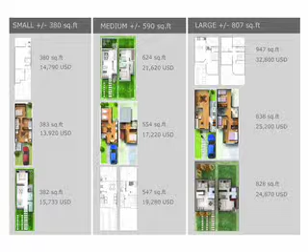They are done with this idea that the car is central in terms of standard or cultural standards. So the lots are very, very small, but they still always insist on having the car inside the lot and having the car in front of the house. So this is a disaster, because what could be free space, what could be the space for you to look out and enjoy a free area or ground level area, is always taken by the car. Other than that, the floor plans are a disaster because they're designed by engineers or by people who are just money driven.

This is what social housing looks like in Mexico. What's interesting is that, for example, these 3 houses right here, these 3 projects, are done in states that have extremely different climate conditions, and still they're the same. The other thing is it's just pretty much makeup, what they do.

Another interesting thing is that it's very aspirational, and the model taken for this aspiration is the American suburb. So I think that's a funny fact. And it's a fact that nobody's really questioning, so that makes it very tough.

So it's pretty much a dead end, and architects don't get an opportunity for this kind of architecture because it's stuck with the system. So the first thing you need is a good client, and we were fortunate enough to find this family. It's a business family, and in the first meeting they told us they were willing to do progressive social housing. Progressive is a word that is usually never linked to this kind of work.

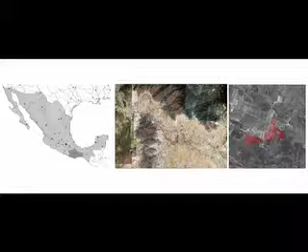It's almost like, in a way, complexity and contradiction, because any color is possible. They mix all kinds of color and then it becomes like a really tolerant system, where when you have so many colors, they just start to blend in a really good way.

The project has the difficulty, or the problem, that other projects like this have, and that is that the land inside the cities is too expensive for this kind of development. So these developments always end up being maybe 25, 30, 40, 50 kilometers away from the main city. So this is a problem, and it's not ideal, but you still have to work within these conditions.

So for these people to go from Oaxaca City, where for sure they will work, to this lot, they have to take public transport because most of them don't have cars, which is an irony because, like I explained before, usually their houses are designed for the car to be like the protagonist. So they usually use this kind of transportation to go, and then once they're in there, to go shorter distances they use these motorbikes.

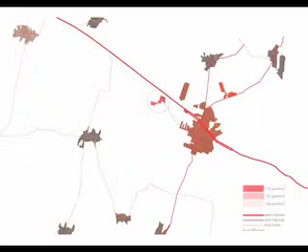If you look at it from an urbanization point of view, this is our site, but these are like urban spots, and they're totally unarticulated and disorganized. There's really no planning for this. This is the 2,000 houses that are the competition, or our neighbor, building right now. And these are our 3 lots.

So the first part of the project was this. It's one hectare, where we're developing only 100 houses because the urbanization was already done and there was nothing we could do about it. They asked us to keep it, and that we would have the opportunity to do the development of urbanization on the other 2 lots. So for this lot, we only designed the model of a house, which I'm going to show shortly.

Making a diagnosis of the place was one of the first things we came up with. This is the system of roads, and it's almost hilarious because it's like designing in the Wild West. When you start to understand it, you find out quickly that the roads don't go anywhere, and there's no connections planned for them.

This was a major concern from the very beginning. We knew that whatever we designed, we had to try to guess and propose a system that could later allow this to grow in a more organized way. It might sound unbelievable, but there are no plans for these areas. And if you were to try to negotiate with the government for a plan, you'd be doing nothing, because that would take years in bureaucratic terms.

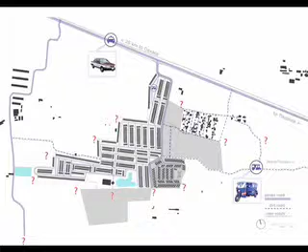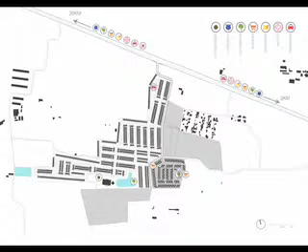This is the system of services that exist in the area. Again, they're totally unarticulated and unorganized. And this is kind of what we are doing right now.

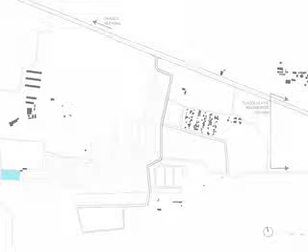So these are the roads again. The first thing we did is put the roads on the corners so they'd be able to connect themselves later with further developments, in the areas our neighbor is working on right now in terms of services. We placed the services in the places we thought were better to articulate the urban program.

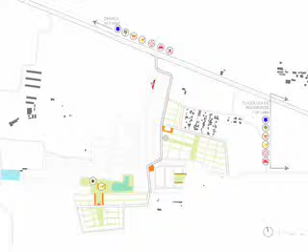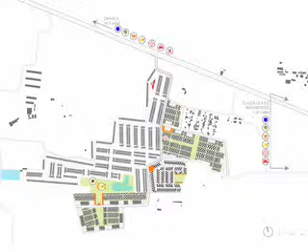This is the mass urban plan in terms of the houses we're building. Overall, we're building 1,500 houses with two different models. This is a model for the urbanization we were able to plan.

The first thing we did was question the regular floor plan I showed earlier, and instead design perpendicular to the street. We immediately found this gave us a few advantages. One is that we had shadow from our own house protecting the void or the garden, and shadow is a major thing you need to achieve in this kind of climate.

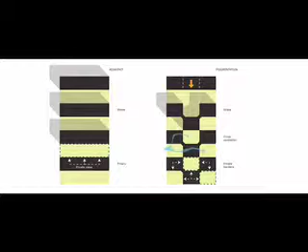The other thing was that working perpendicular from the street also allowed us to have private views, because in other cases the views always head toward the street, and the streets are always very ugly since they're done with no money and no planning.

From there, we took this perpendicular model, and by fragmenting it more we found two other advantages: we created even more shadow, and we created cross ventilation, which was also fundamental for this kind of climate.

So this is what the system came out to be. We have five different models, starting with this model perpendicular to the street, then fragmenting, pulling down or up these different areas from the basic units of the program, like bedroom, kitchen, living room, etc. This house is 35 square meters.

It's going to be $15,000 — that's the price it will be sold for. So this is the basic unit, and this is where you start. From there you develop the next floor in the first stage, or the whole second floor in the second stage, and that's the same for all these models.

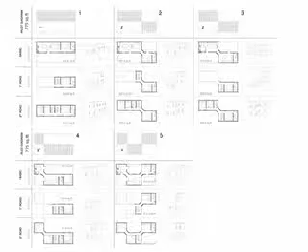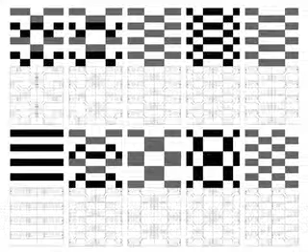With systematic things — and this is always a concern for the office, we're all obsessed with finding a system for everything we do — once you figure out a system like this, it becomes really interesting in terms of all the patterns you can find. These are just combinations of the houses and how they play together in an urban way, or simply creating different opportunities in terms of void and construction area.

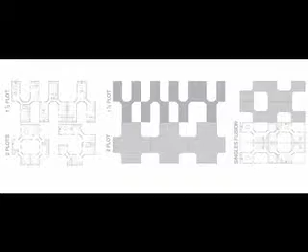The second step after this was making combinations where you had 1.5 lots, or 2 lots, or even two houses fusing a lot with another one, so you maximize the area of the lot and achieve an even higher density.

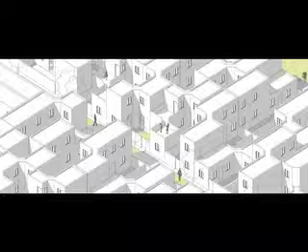These are the different patterns that you have, the green areas. The idea is that we place some of these patterns on the different blocks, so that eventually they start to grow randomly and take it from there. The planning will be finished from us, so we only place a system to make it able for them to keep on growing. These are just random images of what the system would allow you.

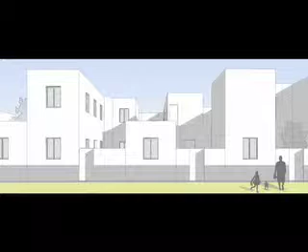The budgets are so incredibly low that there is absolutely no detailing. For example, the window is only one for 1,500 houses, and the window will turn into a door, but that's it. There's no more detailing, no more opportunities in terms of ingredients to solve the problem. Kind of what happens with the corners.

I should have said before that in this case we definitely left out the cars. We made something that in Spanish is called, or in English the translation would be, centralizing cars. Then you have to walk at most 30 to 40 meters, so it's very rational. And you go into these inner streets that at the same time have these canals. There's another problem with floods there, so what we're doing is conducting the water in order to have green all over the year, because there's a lot of water. It rains for a month and a half, very strongly, but then the rest of the year it's very dry.

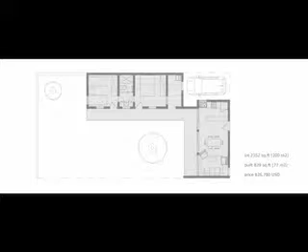This is the house we designed for the first lot, or the first plot. In this case, unfortunately, we were not able to design a system. So this is simply a house to be put in this lot, but it has a plan for you to grow—it goes from 70 square meters to 120 square meters.

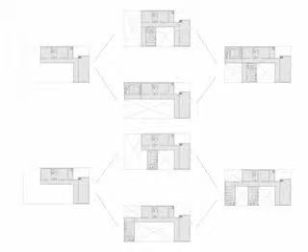This project, as well as the other, is very inspired in terms of patios. And patios, not only from a historical or melancholic point of view, because the patio is without doubt the best way to deal with the climate, or the extreme climate.

For this house, we have already built 2 prototypes, and the rest of the houses have started to be built. This just shows you the construction system, which is really uninteresting. The only thing to say here is that since the hand labor is so extremely cheap, that's the way to go—it's still masonry, like you would have done in antique times.

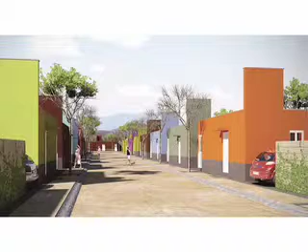These houses are $30,000 for sale—that will be the price. They all evolve, like I said, around the central patio. Same case, but in this instance we were able to design with 2 windows instead of only 1.

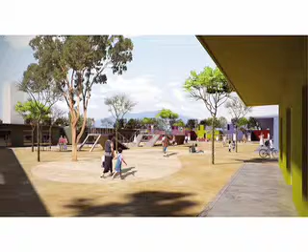It was fun to us because in this case we were able to design a park and other things that we usually don't get the opportunity to get our hands into.

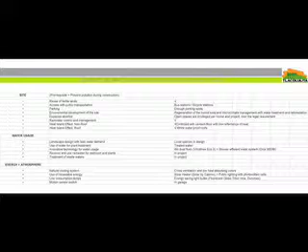The other thing we were really lucky about is that for this project we were able to work on many of these issues that are usually left out of this kind of commission, in terms of sustainability. So we could come up with really interesting solutions regarding the materials, the bioclimatic strategy, and all those kinds of things.